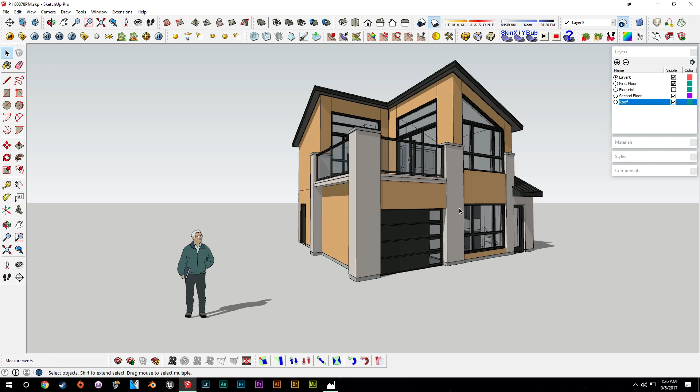This week we're going to get into working on the bedrooms, moving away a bit from the bathroom from the last couple weeks. So we'll go up, turn shadows off, and get the roof off.

We have these two bedrooms, and this one obviously has a bit more space than this one, so I guess this will be our master bedroom, where we can put a slightly bigger bed. If we turn blueprints on, we don't really have any particular layouts from the blueprint, so we can figure that out on our own. Let's turn the blueprints back off since they're a bit useless.

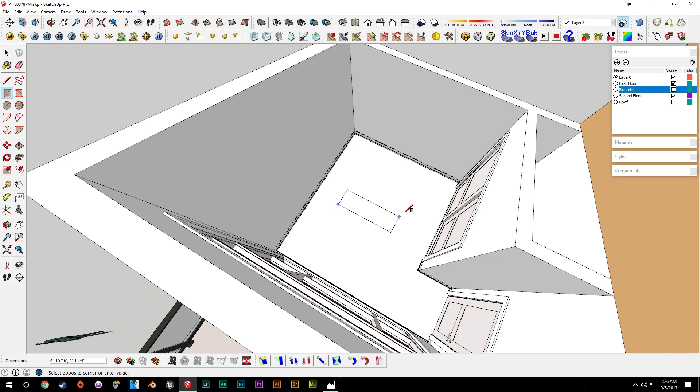So what we'll do is figure out some very basic templates and get some measurements for the beds themselves. In this one, we're going to put in a double bed, with dimensions of 54 by 74, so about that. We can find a place to put this - I guess up against this wall will be best.

In here, I think we'll put a desk next to the bed, and in the other bedroom we can put, I guess, two nightstands. I think that works - that'll give us a couple feet between the closet and the bed itself.

There will be a sort of frame that goes around this, and we'll get into that in a minute. But for the most part, it's a couple feet, and I think that's enough clearance, so we can leave that for now.

Moving into the master bedroom area, we'll put in a queen size bed, I think. So we'll pop that in - that'll be 80 by 60.

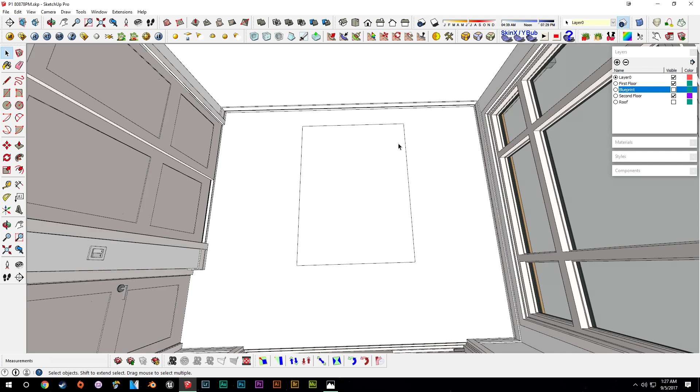That'll give us a decent amount of space on either side here to put a small nightstand, roughly in the middle. That'll give us about 4 feet, and if we were to just use one door, in theory, the nightstand shouldn't get in the way. So we'll put that there like that.

We do have an idea in mind for the bed frame and the bed itself - it'll be sort of a wider frame that goes around underneath, with a very basic design to mimic the rest of the theme throughout the house. So we can get to work building that.

For this, we can use the same bed frame in both rooms, but because these mattresses are different sizes, we'll need to make it a component so we can adjust the scale later. It'll be a bit easier if we scale up rather than scale down, so we don't have pieces going inside of each other.

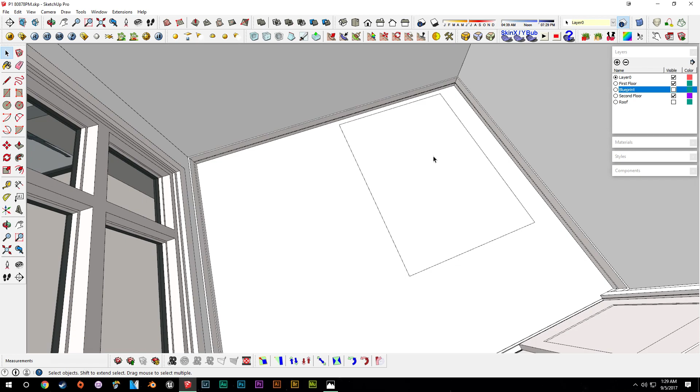So I'll move this a bit closer to the center of the room, and just eyeball it from that picture, collapse that a little bit. We can start from the beginning here - we'll call this bed frame small.

We can get into this, then pull it up, I'd say probably 7 inches. Then we can offset this a little bit past, maybe 5 inches past, and pull this up 1.5 inches, just to get a look at what we're doing here and see how this works.

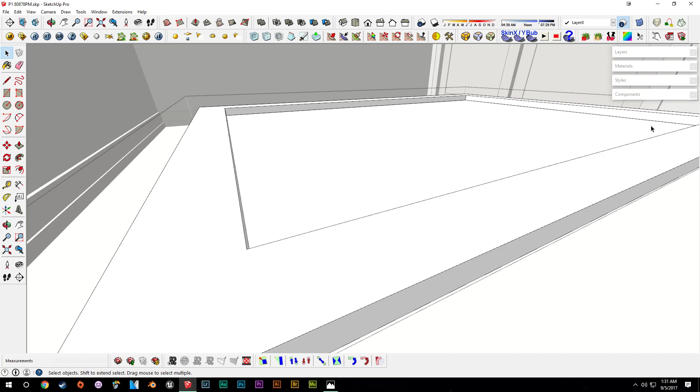For the front, or the headboard, this isn't going to have to come out as far, but we do want this inside rectangle to be the same shape because this will ultimately be our mattress dimensions in the end.

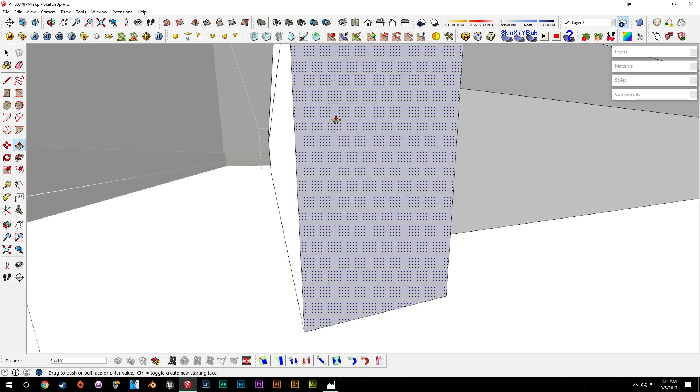So we can pull this square out, say 3 inches, maybe even 4 inches - that'll be our headboard. We want the headboard to come out to the edges here, so we'll draw a guide in, pull this out to there, and do the same on the other side, then clean up the model a bit, drawing some lines across to make sure everything else still looks okay.

Then we can pull this headboard up an arbitrary amount for now, say 3 feet, just to keep an eye on what it is. Once we get the mattress on there, we can adjust it later to see what looks good. So now this is ultimately our frame.

We can adjust it a little bit, pull it up next to the baseboard there - don't want to put it right on it, but close.

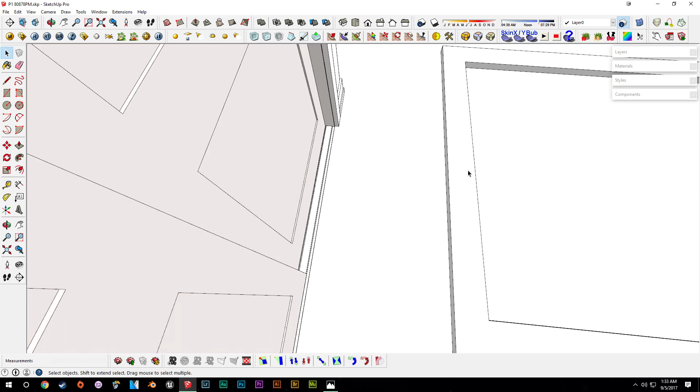Let's see how much space we have—about 2 feet. It's not a lot, but it's okay for now. We can push this over to the corner, not right up against the wall, but fairly close to it.

Now we can draw in our mattress, making sure we're outside of the frame component itself since this will be a separate piece. We'll pull it up about 12 to 12.5 inches. This won't be on a box spring, just the mattress itself. You can see how far it sticks up, about 1.5 inches deep on the inside.

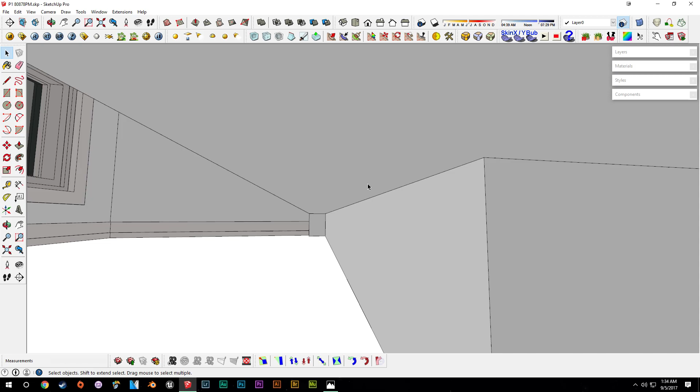Since the mattress and the frame are currently the same thickness, it doesn't look quite right, because the board meets the exact same point where the mattress begins in the corner. So this doesn't really look correct.

So we'll go into the frame again and pull this out 1 inch to give some space to the inside. Then we can pull the mattress down another inch or so, since it's kind of arbitrary how deep it would actually sit inside this—maybe even another inch. That gives us 9 inches of space there.

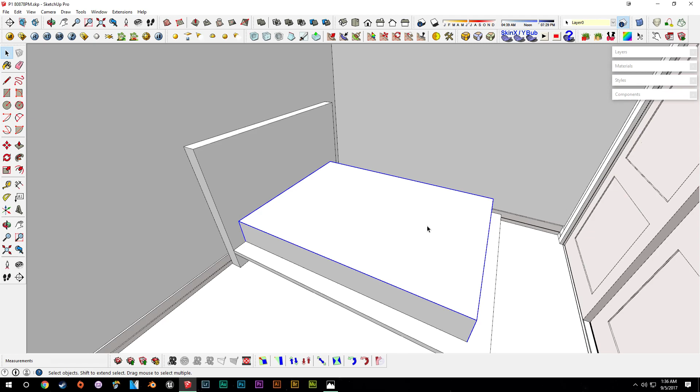Now we don't really need to detail the mattress much, since we'll be putting sheets on it. We can triple click this, grab the mattress, call it mattress double, and hit save. Now we can put sheets directly on top of this. Since we'll be putting sheets on it, we can pull it up another inch to compensate.

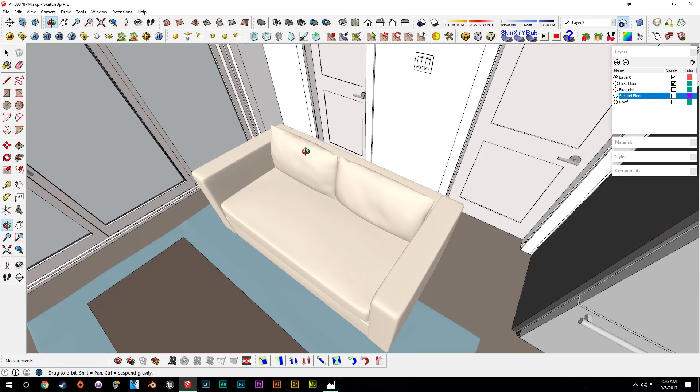To make this look more natural, we'll do the same thing we did back in episode 14, where we made the downstairs love seat—this one here—and smoothed out the edges to make these pillows. In fact, we'll probably use these pillows again upstairs since they kind of look like bed pillows too, so they'll get another use.

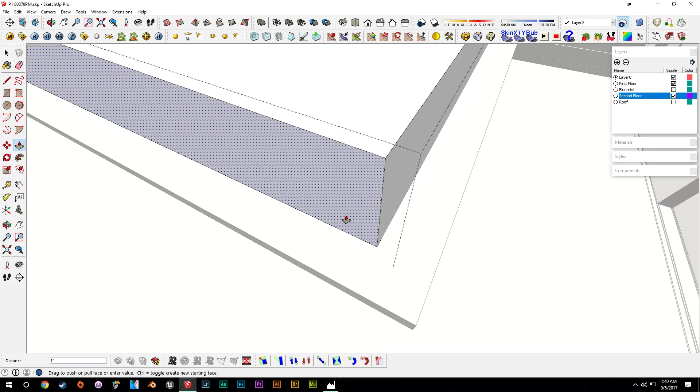We'll hit Control and pull this down to the edge so we have a definitive line here, so we can pull lines out without going through the frame. Then we'll pull a line out here, not too far, and draw it up, making a very basic shape of how you'd expect fabric to fold around the edges if it were a bit more basic.

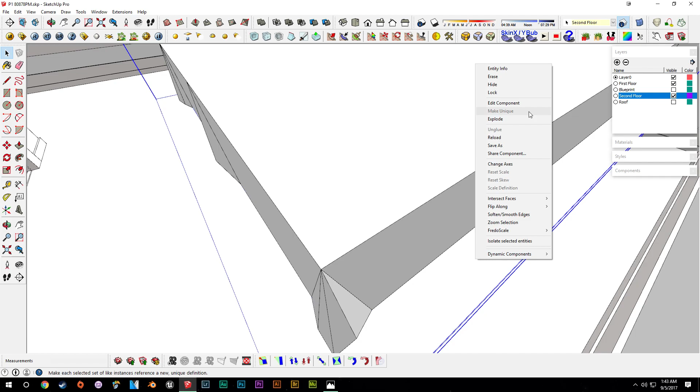So we pull this out here, up to the edge, and pull these down. We'll even go in and erase these inside lines, because when we round these edges, we want them to curl on the outside hard edges rather than underneath, which would make weird folds in the mesh. An easy way to do that is to hide the frame, which gives us a good indication of what the rest of this looks like.

We'll go back in here and draw in these shapes. I think we'll push this in maybe half an inch, just to create a bit of definition for the bed sheets.

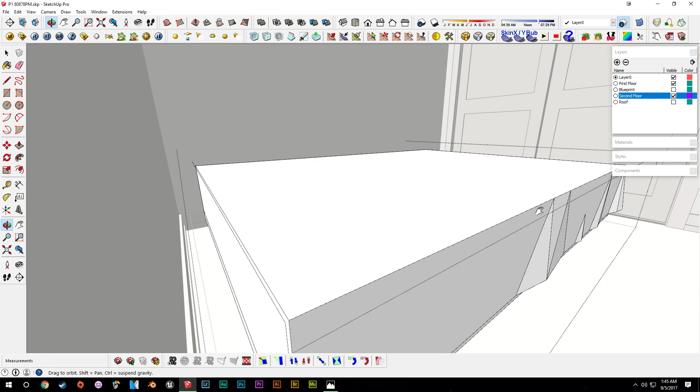So what we can do here is drag this line up, bring this down to 0.5, and drag that across as well. Because we don't want the bed sheets to go all the way to the top of the mattress, to the headboard, we can draw this line in and peel it back a little bit.

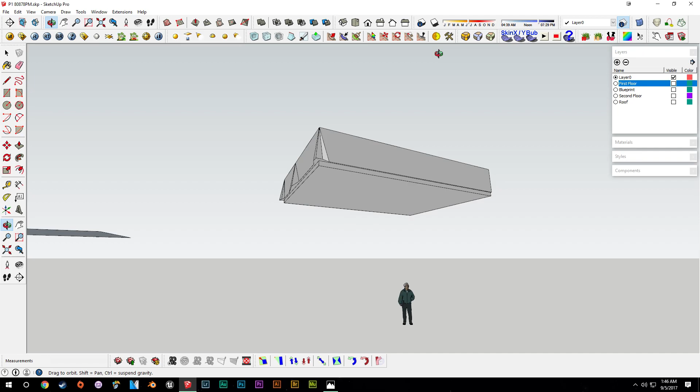We'll draw in another piece a little later that will represent the fold over of the duvet cover. We'll also hide the second floor, maybe the first floor as well, so we can get a better look at what we're working on. It also helps when we turn on hidden geometry, hit K, so you can see a bit more inside of the model itself.

When you have the first floor and second floor on, it can get a bit hectic with the amount of lines we have. It also doesn't help that if you start erasing things outside of components, you can start erasing geometry elsewhere in the house that you won't realize until later, and then there's no saving it - you need to go back and redraw a lot of stuff. So it helps in this instance to just clean up what's on screen so you can boil down into the finer details.

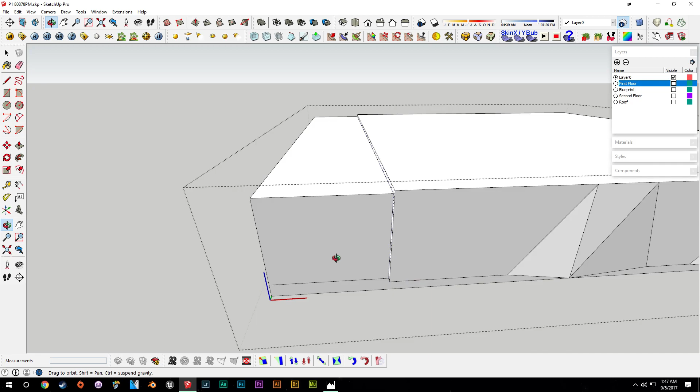So now we can go into this and pull this back, and bring it to about here, which will be reasonable. Then we can leave that where it is and deal with the edges of it after.

With the way this is being put together, it might be more logical to have these be separated, because the plan now is to make the duvet rounded, and then put in the overlap part. If we do the overlap part within the same mesh, the hard edge where the fabric would fold over - like you'd see on a normal bed - will be lost if we start smoothing everything.

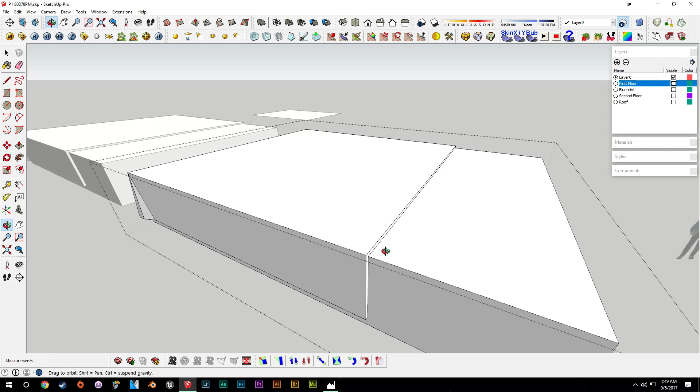So we'll want to make that a different piece. If we're going to make it a different piece, it would help if they were separated components. So what we'll do in this case is back out of this, duplicate the mattress, hit explode on that so it's separated, then go back into this piece and erase the duvet.

So we'll need to backtrack a little here, changing the plan. We'll erase the sections that connect the mattress to the duvet, then triple click all that, erase it, and draw this stuff back in. We can pull the line to here - if we hold shift, that will help us figure out where that point is. Then we can just draw these two lines back in. That should complete the mattress.

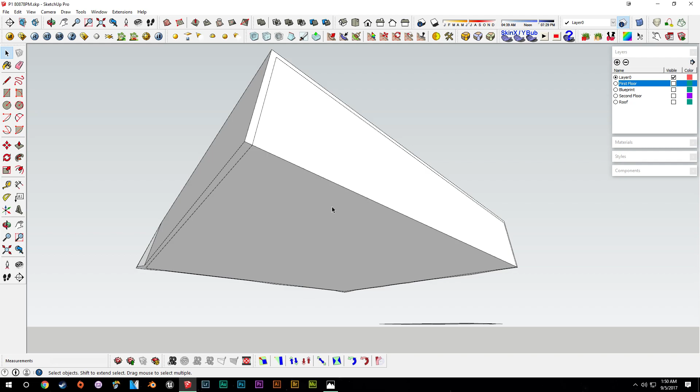With the piece we duplicated, we just erase the mattress itself, and now fill this in so we have an inside to the mattress. Then we can offset from this inside line, bring this in say an inch, then pull this line to the front - we'll want to make sure we're on that axis. There we go, and we can erase this inside line and erase this one as well.

Now the measurement we have is 1.5 inches, so we can drag this down 1.5 and then drag this inside piece up to there, erase our guides. That will help separate our duvet and mattress, and increasing the width here will also help the two models blend together more seamlessly - you'll see that in a little bit.

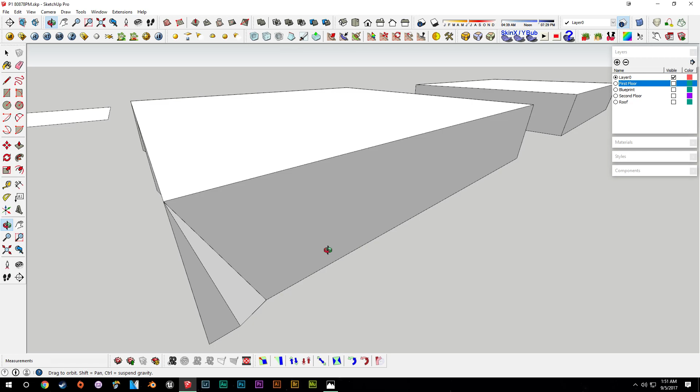Now we can get back into detailing our duvet cover itself. All right, and I think that will do it for the basic shape of what we're looking for here.

So now we can go ahead and triple click this. We'll say mattress cover, and then go into it, triple click it again. And we'll want to save here just in case we make any mistakes or would like to revert to this point, then we'll be able to do that.

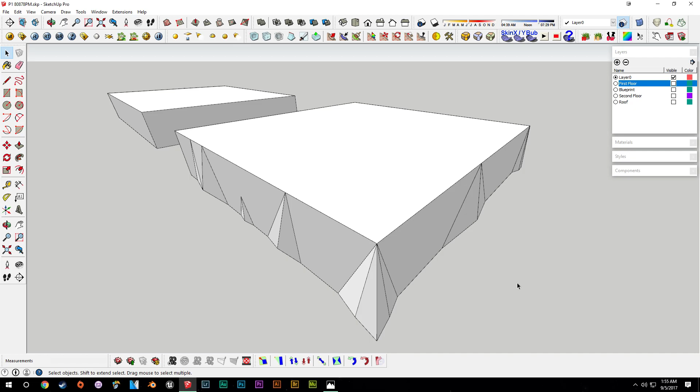Now we can go into our cover. We'll triple click this and go up to Subdivide Selection in the Artisan toolset, and that'll add a few more triangles. If you don't see these triangles, you can go up to View and Hidden Geometry, and that will toggle those. We'll click that again, add a few more triangles to this subdivision, and see what this looks like. We'll hit Smooth Selection and see what that's starting to look like.

It looks like the model is sort of snagging on different points. So what we can do is triple click everything again, make sure it's all selected, and try that again. It's definitely snagging on some areas. Try it again with everything selected. It's starting to look a little less like a duvet cover and more like a mess of polygons.

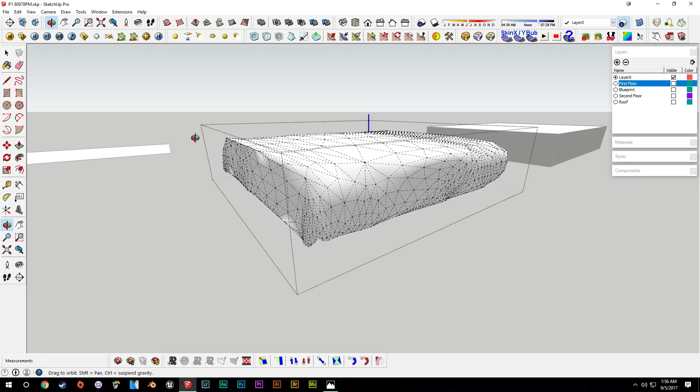So we'll back out of that. I think some of the faces we've added to the edges of the mattress are causing issues with the way it subdivides. So we'll go back in and correct some of these, get rid of some unnecessary lines. In fact, I think what we'll do is pull this all the way through, making it solid. It won't necessarily matter too much with the end result because we'll still get a bit of rounding going on with the edges here once we start subdividing it.

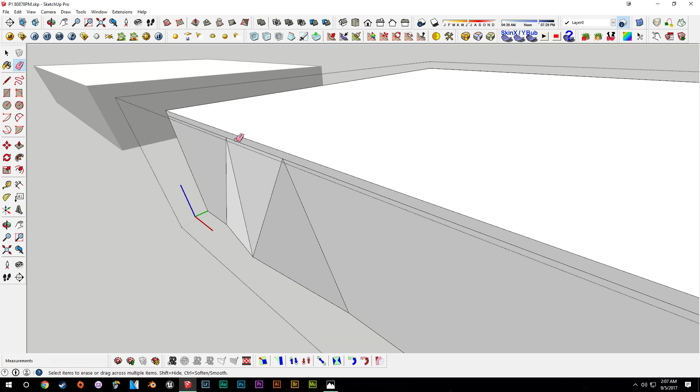I think to help smooth some of these faces we'll hold Control, bring this up, and go around and clean this up. Then we'll want to pull these edges in maybe half an inch or a full inch. Yeah, maybe half an inch, just to help the curving process have a few more faces to latch onto. We could do it up here as well, but we don't necessarily have to because this will be covered over once we finish, so right now we'd just be adding unnecessary geometry.

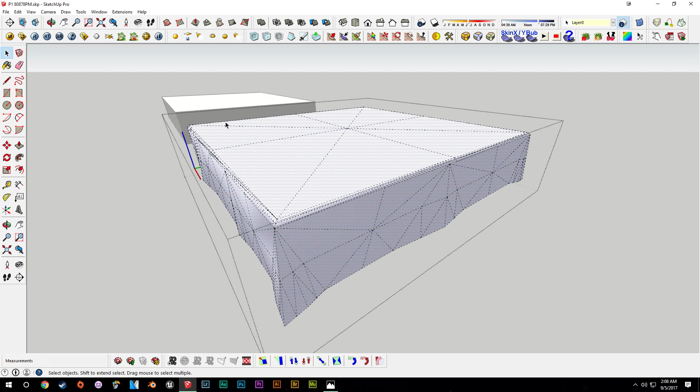So we can click out of that again, save there, and give ourselves another reset point in case everything crashes or we cause some sort of irreversible complication. Go back in, triple click, subdivide again, and then we can start smoothing and see what we end up with. We do have some definitely weird issues going on there.

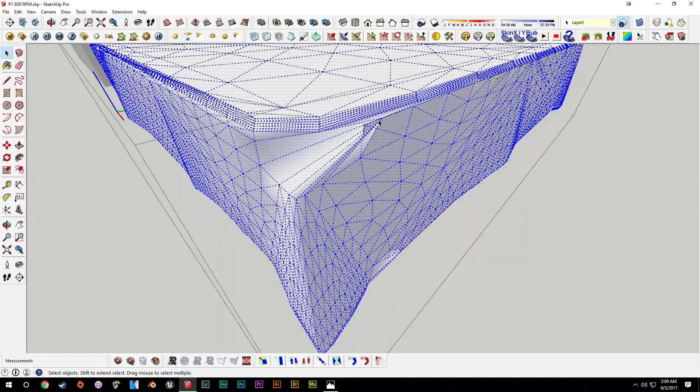So maybe we'll do a third subdivide. It does seem like it's starting to pull from some weird points. If we just hit smooth here, you can see the entire corner sort of gets mushed over to the side, and it ultimately ends up deselecting some lines. So we'll have to figure out what the cause of all this is.

This does happen sometimes with modeling. We can probably get rid of this lump here and see if that sorts anything out, and make sure we don't have any hidden geometry on the sides. It's still definitely getting unevenly pulled. As you can see, the line curves up there, which is fine, but then we end up having this sort of divot taken out of the side, which is happening on this side as well. I guess that's just how it's pulling everything together.

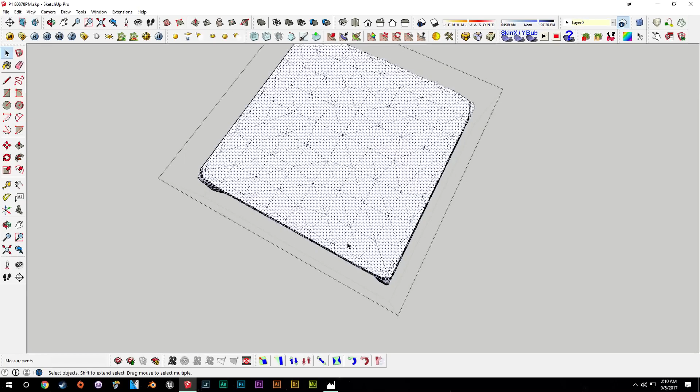I still don't think this is really working the way we want it to, so we'll actually perform a test to see if we can get a basic rectangle, about the same shape, to do what we want. Previously when we worked on the love seat downstairs, we rounded the corners and then pulled those in, and that worked pretty well. But I don't think that's going to work here, because we need to do the fringe on the underside, which is a little less than rounded in the way that it flows off. So we'll hit these a couple of times and see where it pulls from.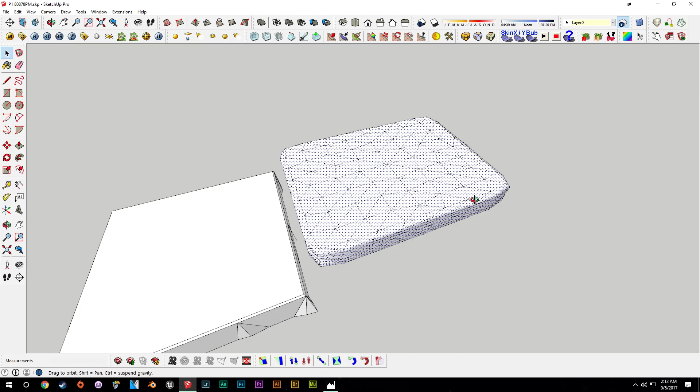And it's definitely doing a base, how you would expect it to pull in evenly on all the corners. Even if we say subdivide again and say smooth, it starts pulling it in more naturally than we were getting on the mattress.

So I think what we'll do is head back to this design, and we'll erase these pieces across the front and fill it in with one basic piece across there.

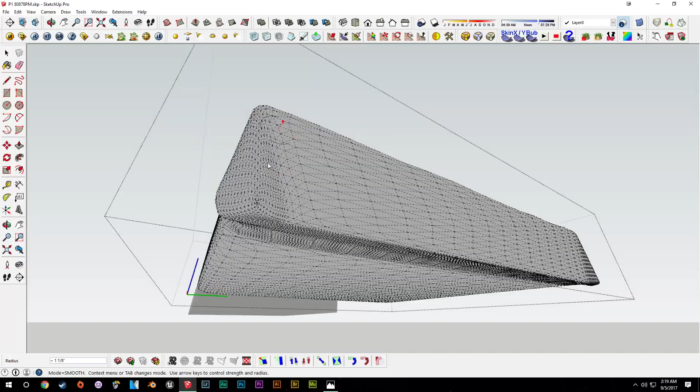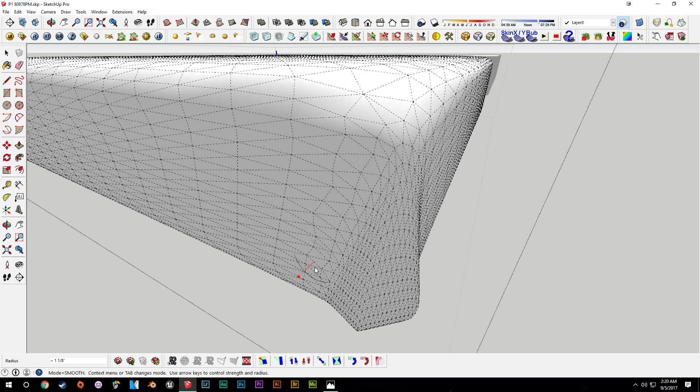Now, to get this to cooperate with the way Artisan and SketchUp work, we really had to boil the mattress and duvet model down to almost nothing, apart from the folds on the ends, then subdivide it multiple times and manually smooth it so it doesn't pull in weird directions and looks more organic. It's definitely more of a pain than with the chair, since SketchUp isn't really conducive to natural fabric flow.

So I have to smooth this out a bit and make it look better. Then we can go back in and make it look more organic with the folds and wrinkles you'd see in a duvet cover.

We'll turn off hidden geometry, turn on the skylight, turn on shadows so we can see how it's all working, and start adjusting things to see how the light reflects off of it.

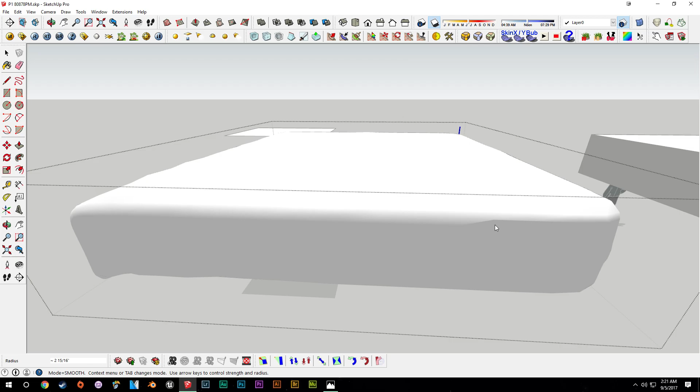Of course, the front doesn't necessarily matter since we'll be changing that, but we want to get rid of these hard shadows on the edges. We can tab through some of this and maybe pinch certain areas to make different folds and creases so it looks a bit more like fabric.

We'll randomly start inflating some of the top here to give it a bit more flare, and then go back in after and smooth a lot of this out to get rid of those hard peaks we're getting.

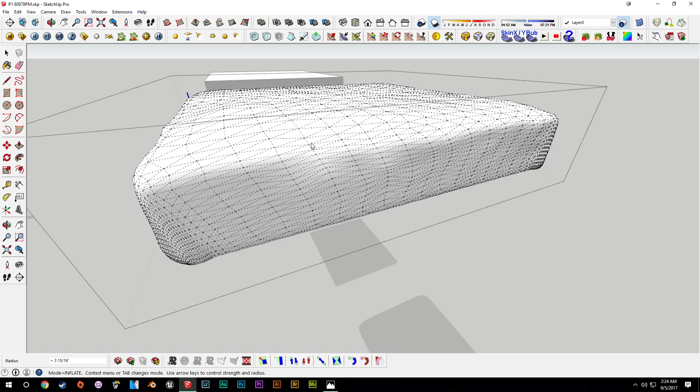We'll take the inflate tool and press the down arrow to scale it in a little, pushing this in, not too far, maybe a little less - minus it down to there, just to create some negative divots, and maybe round off this edge a bit more than it is.

It's a rather long process, but one you want to get right, because the look of fabric is a telltale sign in rendering. If it's not detailed enough, or a little over-stylized, or too smooth, it shows - so it's definitely something you want to take your time with.

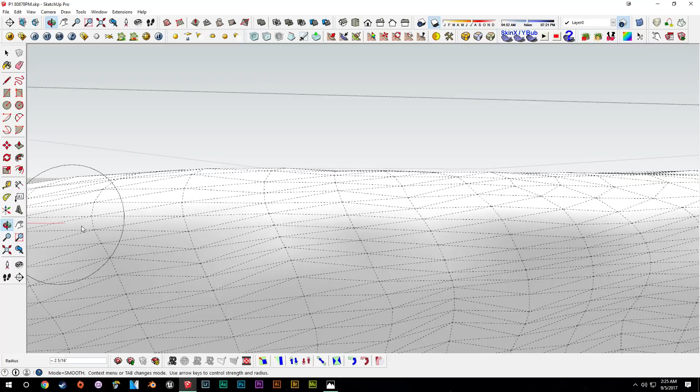This part really depends on your computer. If you add more and more triangles, or polygons rather, you can make it look more realistic, but it starts to bog down the machine and can get pretty cumbersome, especially with plans that have multiple beds and multiple pieces of fabric throughout the model. It can become a bit of a nuisance.

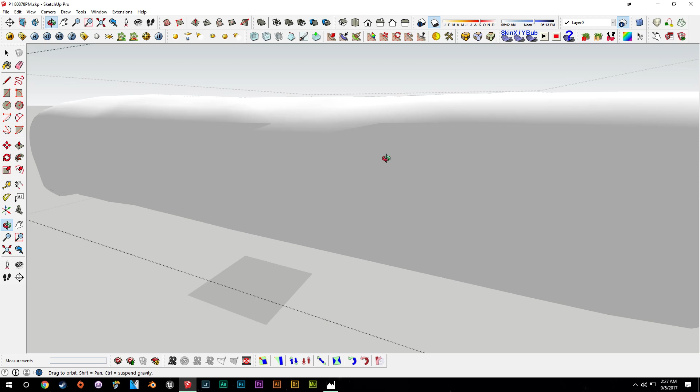Honestly, it would probably be a lot easier in another program like Maya or Blender, where you can simulate the way fabric looks a bit easier, but that requires some knowledge of how those programs work. So depending on your skill level, you can either do it this way or go through Blender or something like that.

So now with the mattress, we'll go in here and round our corners like we did with the base seat downstairs on the love seat.

We'll say offset, do 1 inch, and 5 subdivisions is fine. Then we can subdivide it, and once it's fine we can start smoothing it and pulling those edges out. That'll give us a more natural mattress look, which is fine since this is effectively supposed to have sheets on it.

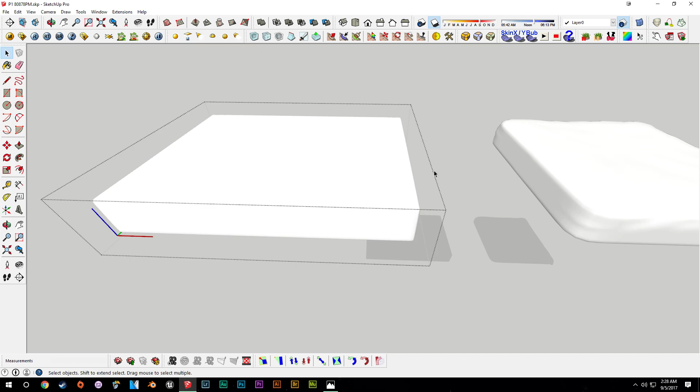We can go in with our brush tool again here and just start smoothing things, maybe even inflating it a tiny bit and making this a bit bigger. It's really only towards the front, or the top of the bed, where you'll notice anything we change, because this bit will be a little more exposed than the rest of it. So we'll do some minor adjustments here, then swap over to the smoothing brush again, and make sure all this isn't too sharp.

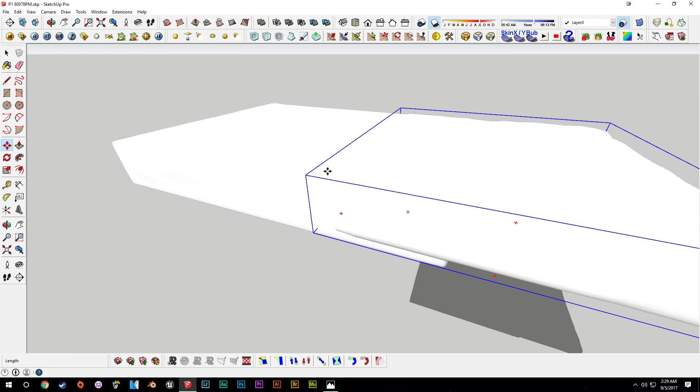Turn that off, and then we can pull this up and keep it on the axis so that we can keep it separated. Because this is all white and difficult to see, we'll bring in our panel again and go down to materials, and make this maybe something a little less aggressive, maybe a gray. Pull this into there.

See how it all lines up? We'll probably pull it up a bit higher so that it's not intersecting. And what we can even do is maybe scale it a bit so that it fits a bit better. Something like that.

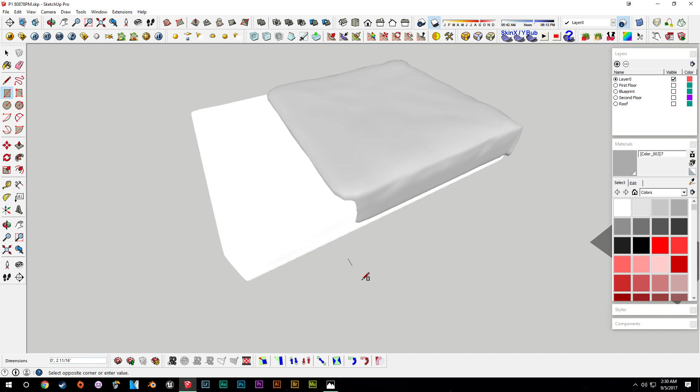Now we'll want to do the fold-over bit, and we can again go in with a rectangle tool here and draw a base, because we don't want it to be influenced by any offset angles of these sheets. We can pull this bottom piece up to lower than the sheet itself, because this will get pulled up, and if it's a little too low after the fact, we can actually scale it.

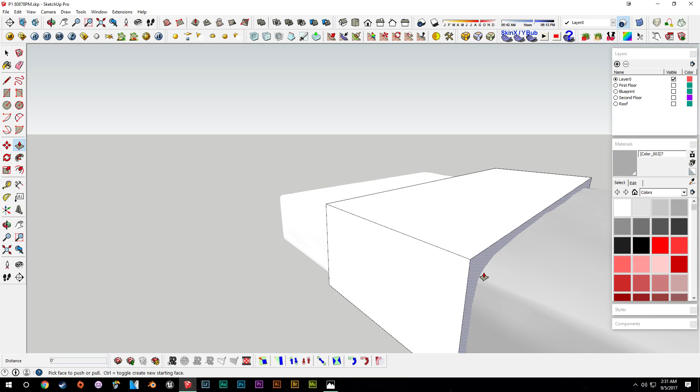Now we can pull this section over, and we'll turn off shadows again just to help improve performance a little. Pull that over to about there, not that far, but about there. And then this piece to about there. So there we go. We don't want it to be that thick, of course. We'll probably have it be about that thick, and maybe line up a bit better with about here. So we can play around with this a little and see what it looks like.

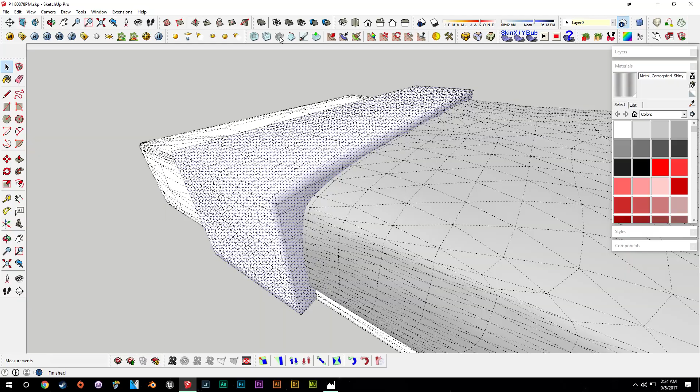Now we can start subdividing this as well. We'll go in and make sure we have our hidden geometry on, subdivide it a few times, and then start smoothing it out. Just keep pulling it in and seeing where it rests. It is a bit sharp, but it's actually not too bad. So we can go back and select this, start pulling some of these in just to correct the look of it, and actually we'll go in and hide this.

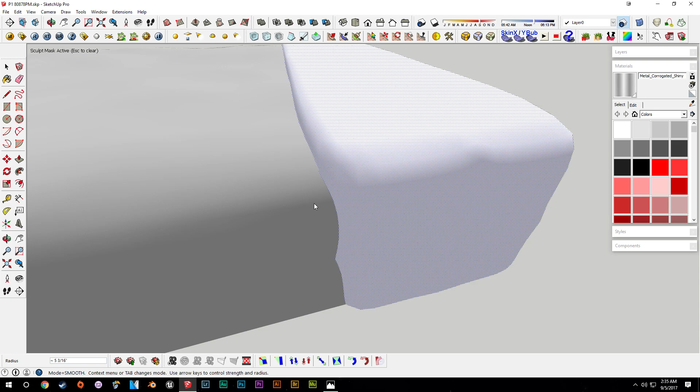We can probably hide this and just show our hidden geometry again. That's not going to work because we do have that in the way. So we'll actually move this up here, say 8 feet, and move that up there as well 8 feet, so that we know they line up properly. Then we can probably even start pushing some of this in, maybe subdivide it again to give us a bit more accuracy.

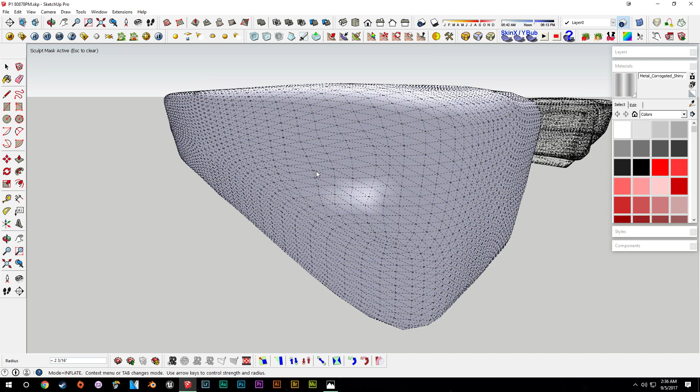Now we'll want to push it inward a little and make this a bit smaller, then start doing this on this edge, just so that when we put the duvet back in place, it gives the impression of it turning back in on itself. We can bring these back down 8 feet and see how it all meshes up. It works a little bit—you can kind of see in some areas that it's folding back in.

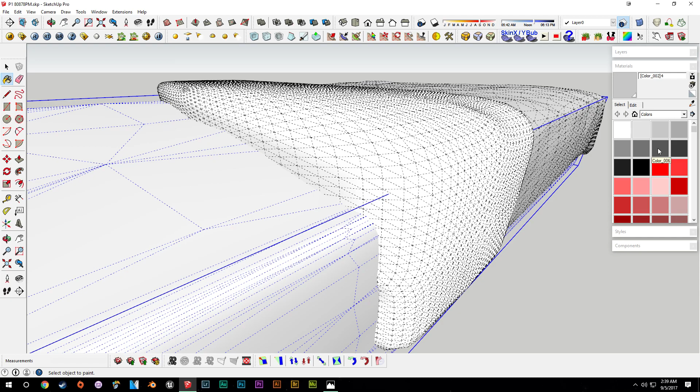Just smooth off these edges, bring this in a little further. Then we'll want to push this edge in as well, and probably change the color of the mattress just to make it a little easier for us to distinguish them. We can probably bring the mattress up a little until it starts intersecting—and it has there. I think it actually got shifted over a little bit.

So yeah, we'll go back in here. Move this up until it starts coming through in some areas. And it has there.

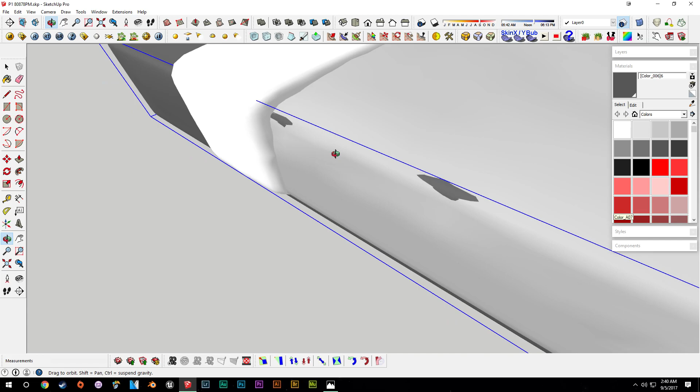Probably what we can do is leave that where it is, go back into the mattress, and then start pushing these down so that they don't intersect. Anywhere it starts poking through, we'll find the place where it comes through. It doesn't necessarily matter what this looks like on the inside or the physical mesh of the geometry. We just want it to look like a bed.

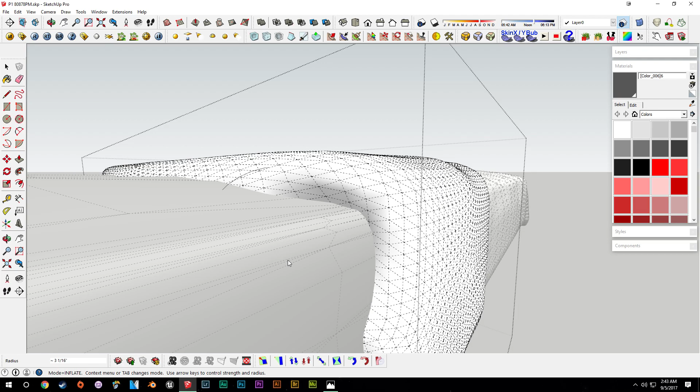It doesn't need to be super accurate. You don't need to have all the little odds and ends in place. Now we can go into the fold piece that we have and start pushing it in, and go into the inside of the mattress and start manipulating the inside piece. We just want it to look like, at least from the outside, that the fold is starting to go back in on itself.

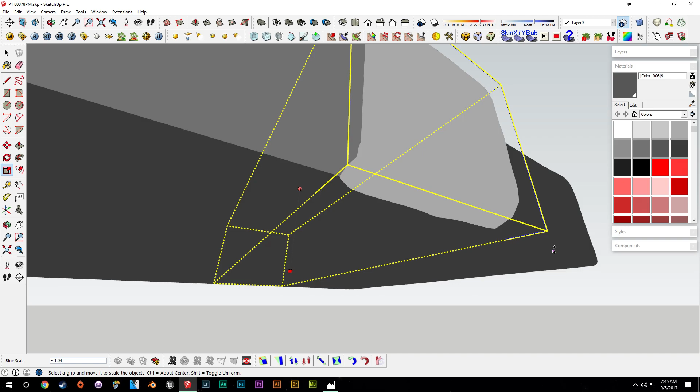There we go. We'll have a look at this again from the outside. A few small adjustments, and tab back over to the smooth tool. Make sure it's facing out just a little bit, and then we can run along this edge. So now we'll probably scale this up a little tiny bit, maybe down a little bit more. There we go, leave that like that.

I think this is actually not that bad. We'll probably grab both of these and scale them up a tiny bit, leaving a little less space for the pillows to go. Make sure nothing is poking through. And we can go and recolor the mattress white, make this a darker gray, make this a light gray, just to differentiate for now.

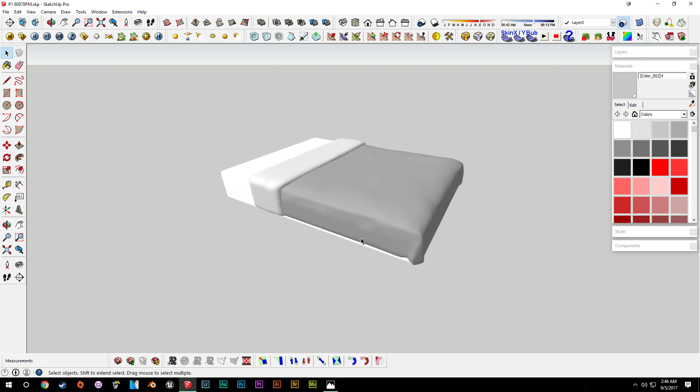We do have some polygons poking through at long range, so we'll go in and sort those out. Grab this and just push those edges in. There we go, that'll do it for that.

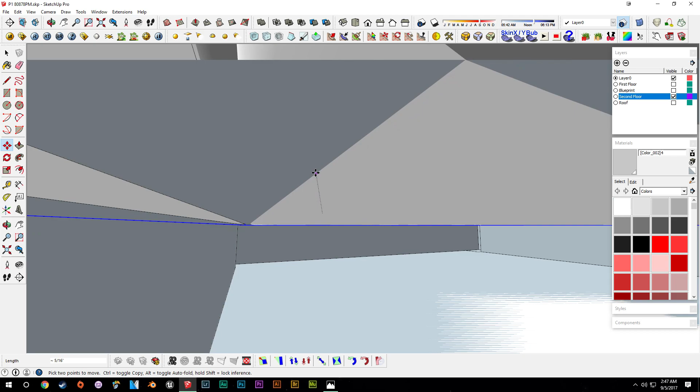Now we can go back into our layers, turn on the second floor again, turn off hidden geometry, and make sure that everything is sitting where it should. Lower the mattress down a little bit, make sure that it's sitting on the bottom. Bring it up to about here-ish, 5/16, and see what that looks like.

Turn on the shadows even. Of course this is without the roof, but it gives us a good idea what everything looks like. I think that's actually not too bad looking. Turn shadows off, just make sure that this isn't intersecting at the headboard. Now, very close to it, which is good.

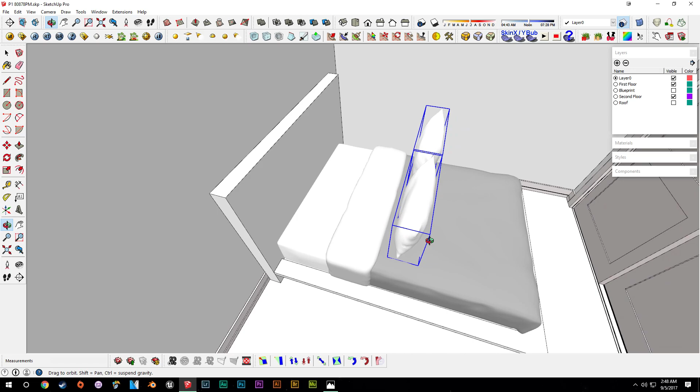Now we can pop back down into our first floor, and I guess we can put all this stuff on the second layer now, and head into the living space and grab these pillows from down there. Then just paste our pillows in here, grab a Q and rotate, and even just the move tool and start slotting them in.

We can prop them up against the headboard and scale them down a little bit to fit the beds a bit better. Move them up so they're not intersecting there. There we go, and just lay them up against the headboard like that. Try to get them centered a little bit better.

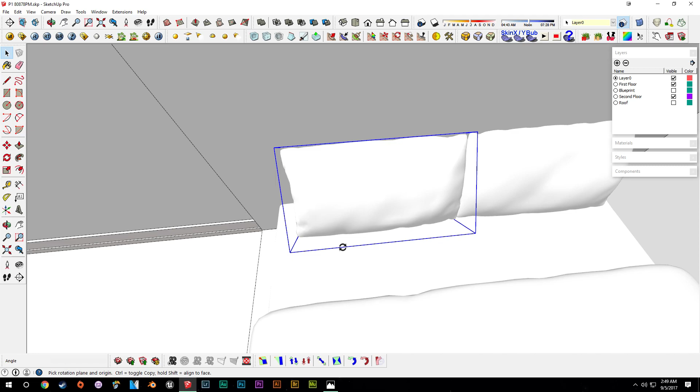Maybe we'll have them be propped up a little bit more than that, so we'll just drag them out straight. Make sure they don't intersect again. You can have them intersect a little bit just so that you can see where there's some compression against the headboard. And we can probably rotate these as well, rotate them sort of this way. I think that looks pretty good.

We'll actually probably pull this up a little bit more so there's a little less space exposed there. And we do have some of the mattress poking through, so we'll scale this as well. Bring this up, and then scale this out. Let's say 1.005.

Just to make sure it clears a little bit better. And again on this side, 1.005. And so now we can go back in and adjust our headboard.

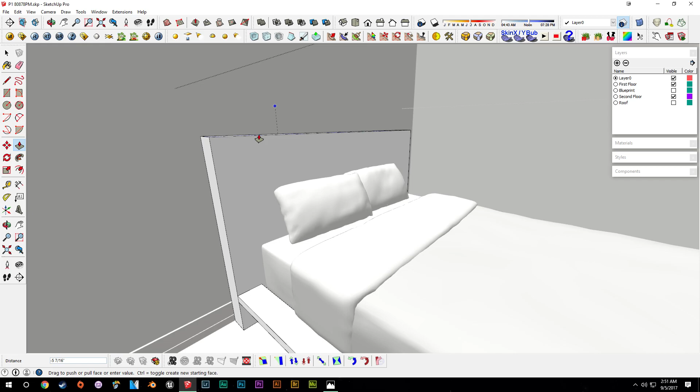We'll push this down a bit further. We don't want it to be too high off there. Maybe half the pillow again, a little bit around there. Higher then. So we have 3'1" currently, maybe 3'4".

So we can drag it up to there. And what we can probably do is go ahead and add another set of pillows in front here, just to add another little layer of detail. And then we can maybe do a -1 scale on just to sort of mirror the design, and maybe we'll have them be a bit smaller as well, scale them down. We can put them here. There we go. We can make these another color as well, maybe a bit darker.

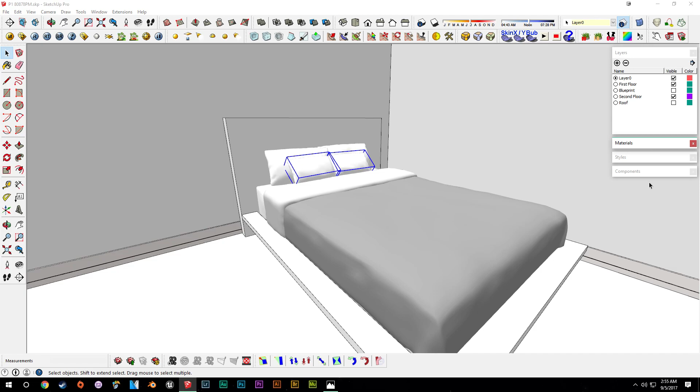And I guess we can sort of start getting into some of the colors. We can make this red, the usual red, and then start modifying it. Make this sort of a wooden color, maybe a little bit of a washed color, almost like some of the wood downstairs. Something sort of like that.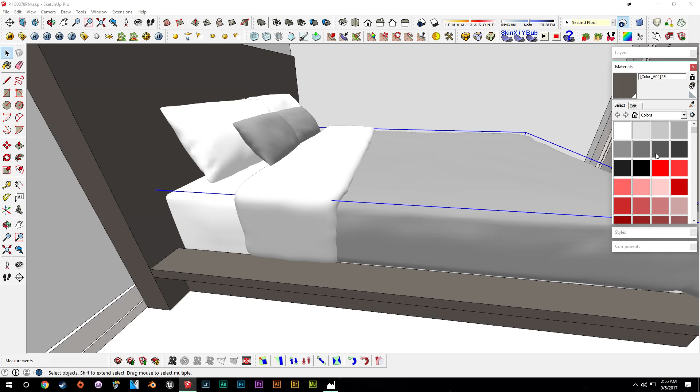And then maybe almost sort of cream bed sheets. Sort of, there we go. And then just mimic that, make the pillows the same color. And then of course we have the outside duvet color, which would be a little bit different, maybe a black, almost black color, something similar to that.

So we'll make it a red and then adjust. Maybe something like that, and then these pillows can be a similar color to there. So we'll just sample it, paint those.

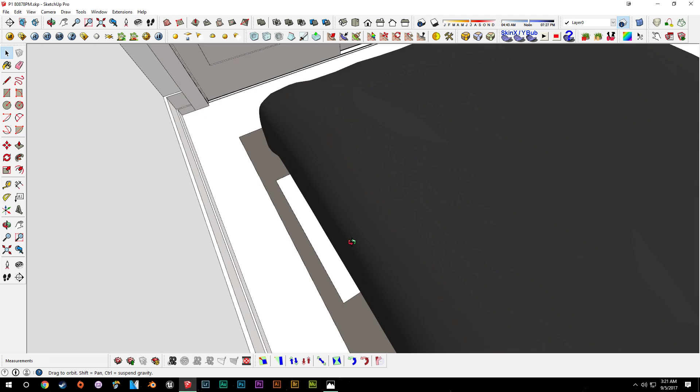And so now sort of as a last little flourish we can do for the bed is actually add a sort of a blanket to the end here, and we can do that easily. We'll just take our rectangle tool and draw something in here on the frame of the bed and pull this in. And obviously we want this to be above the duvet there.

Can pull this in, pull that side in as well. And now we'll want this to sort of hug the same sort of general shape as the bed. So we'll just draw sort of a loose shape around it and then bring those corners off. Now we can take the bottom and pull that up a little bit just to give it a little bit of clearance on the bottom.

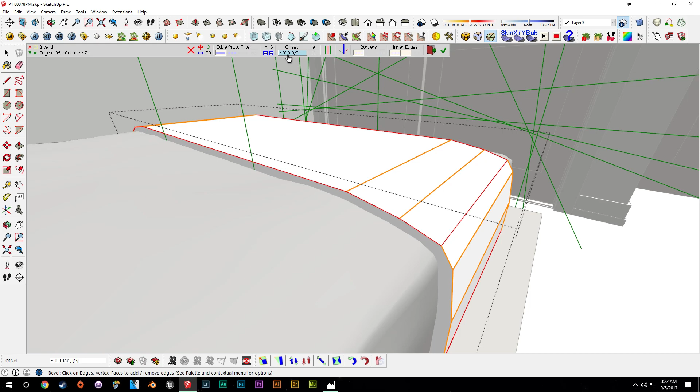And then we can group this. We'll say mattress blanket. And we can go in here and we'll just say sort of take those corners off. And obviously we don't want it to be 3 feet, so we'll say maybe 0.2. Respect strict or offset, and we'll say yes to that.

And then just sort of give us a loose offset there. See what that looks like. Hit enter. And we can just see our hidden geometry, and that sort of just gives us a very basic offset to play with when we do the subdivision here.

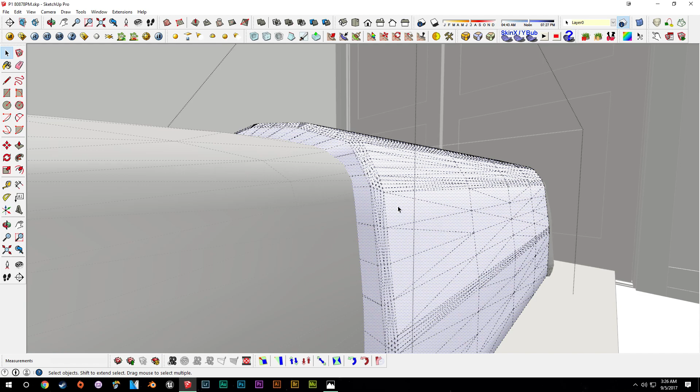And then we can pull this in a few times with smoothing. And I think what we'll do here, just to alleviate some of the squareness that we have going on with the edges, is just undo that. And instead of pulling it in, we'll do another subdivision, and this will sort of add a few more triangles in here. And then we can start smoothing it, and then we have a little bit more to pull from. And that'll help round it out a bit better.

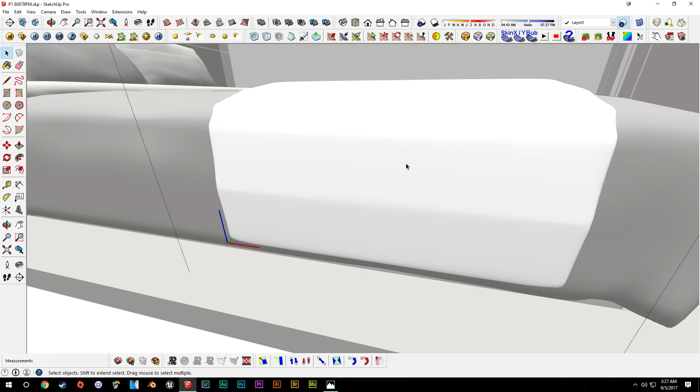And then we can just turn off hidden geometry and see what all this looks like. It's a little square still. See what this looks like if we were to do the subdivide and smooth. I think that looks fine with the 1. We'll just hit enter there. And it's still very rigid.

But we do have a lot of triangles to play with, so we will go in here and actually tab over to our smooth tool and then just start playing with some of these edges. And then what we can do, just to make this a bit more blanket-like, is actually duplicate this, drag it up, and actually scale it out.

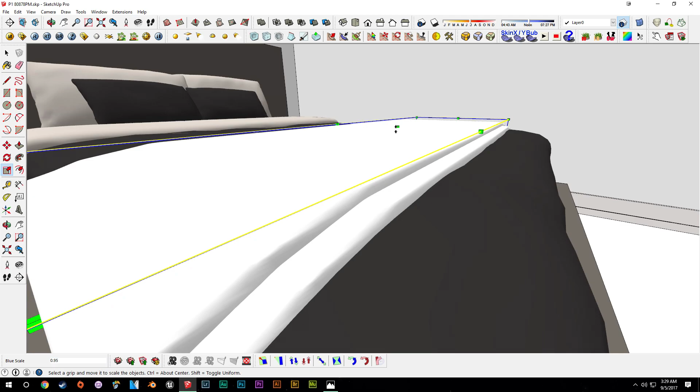We'll offset a little bit, turn on our hidden geometry with K, bring this down to the bottom of the other blanket piece that we have. Press K again, and then just pull this out so that it's sort of overlapping, sort of almost like it's the same blanket but folded back on itself.

Say 0.95. And maybe we can take this one in here as well and rotate it just a tiny bit to help offset sort of the fold, make it less perfect. And we can take both and offset those as well. And then take both of them and then bring them down inside. Just make sure that the blanket itself, the first layer, doesn't actually go inside the duvet at any point. And maybe even rotate it a little bit, maybe say 0.2 of a degree.

Just because it is a little bit higher on this side than the other side, it seems like. So pull it up to there.

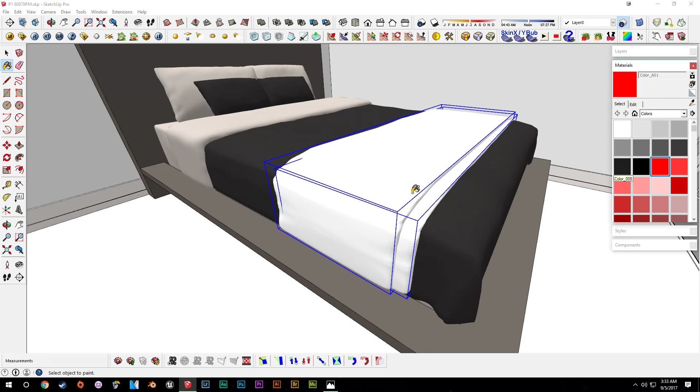And we can take these, bring our layers back in here, head down to the materials tab, and yeah, we'll make them red. We can adjust that, and maybe we'll make this almost a sort of a black color as well. And maybe we'll change the sheet. So we'll actually grab our bucket tool, sample this, and then head back to our cursor with spacebar and just grab these, so now we can manipulate them, make them a little bit more blue.

And so now that we have the side room done, or spare room, whatever it ends up being, we can actually take all of this, and maybe what we'll do rather is take all of the mattress pieces and the pillows, and we'll just say bed on that, and make sure that it's all one piece. It is.

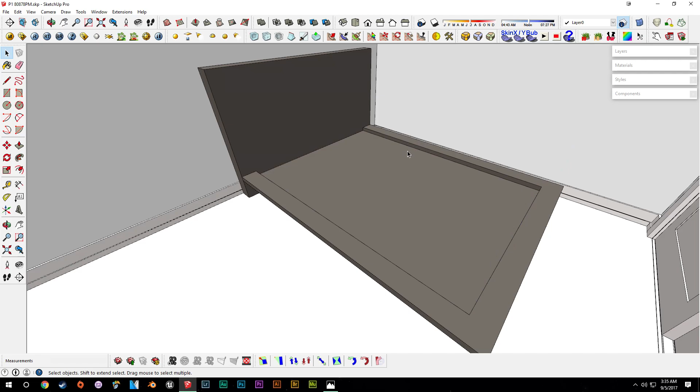And so now we can copy this over into the other room. Just bring it over here. And of course we'll want to make sure that it's actually on the floor. So we'll drag it up a bit, then drag it down until it snaps. There we go.

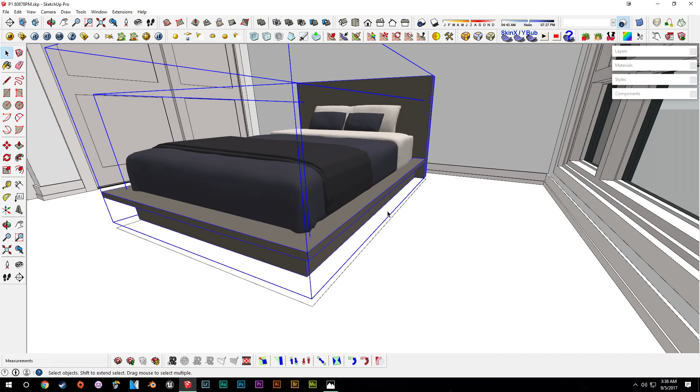And so looking at this now, I know the original intention was to modify this and make it a bit bigger to be a king size. I think we'll actually leave it as a double bed in here as well, because it is going to add a lot more extra frame around the outside than ideally we want, because we do want to have a nightstand on each side, and that's going to cut into the amount of space we have left to add those, especially with the closet as close as it is. So I think we'll just leave it as a double bed.

So we'll erase that, and I can bring these in a bit closer to the baseboard, and then try to center it up in the room a little bit. And we do want to have different colors in this room as well, so we can modify a lot of this stuff. We'll just go in loosely, and I guess we'll have to say make unique on this, and it is. Just go into this and paint it red so we can modify it.

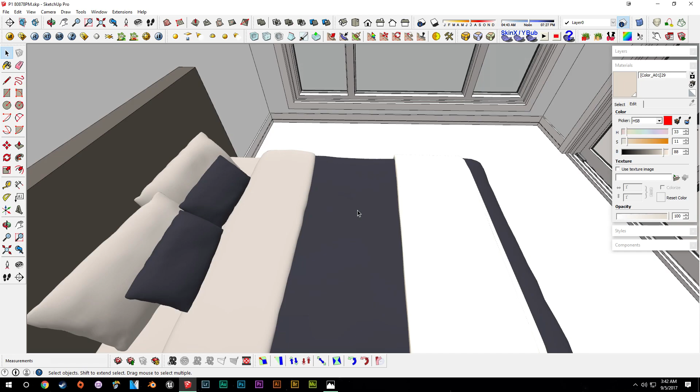And we'll have the colors in here be a little bit lighter than in the other room. And of course, a lot of this stuff isn't going to be final. When we do get into the rendering stage, a lot of it will be trial and error on how certain stuff looks under certain lighting, and different directions we can have the cameras facing and all that sort of thing.

Make that red, and then we'll bring this out. We want to make this almost white, I guess, white sheets. And so I think this is actually a pretty good ballpark for in here. The colors are probably not finalized, but I think it's a pretty good general idea of what we're after, especially in shape and tone, and we'll sort of mirror those designs in the nightstands next time.

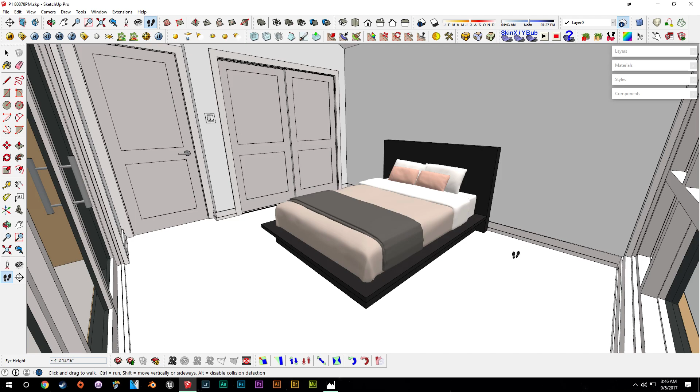And so that's going to wrap things up for this part. Next time we'll get into doing the nightstands and other little bedroom features. But for now, getting the fabric and everything done is a massive step forward, and can obviously take a while to get it to look close to right.

Sometimes SketchUp doesn't necessarily do what you want, so you might need to take another approach or another stab at it in a slightly different way. But for now, I think these are actually looking pretty good, so we'll leave it there, and we'll have another look at them further down the line when we get into the rendering phase and see how they look in the rendering engine.